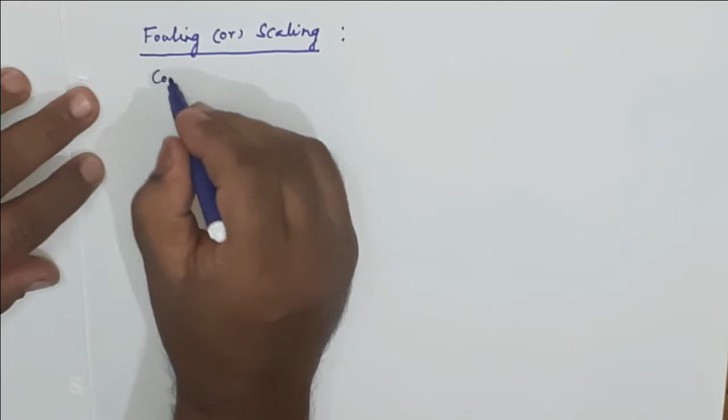Now we'll see about the fouling or scaling. Apart from the convection resistance and conduction resistance, there is some resistance induced during the flow of the fluid, which is called fouling resistance or scaling.

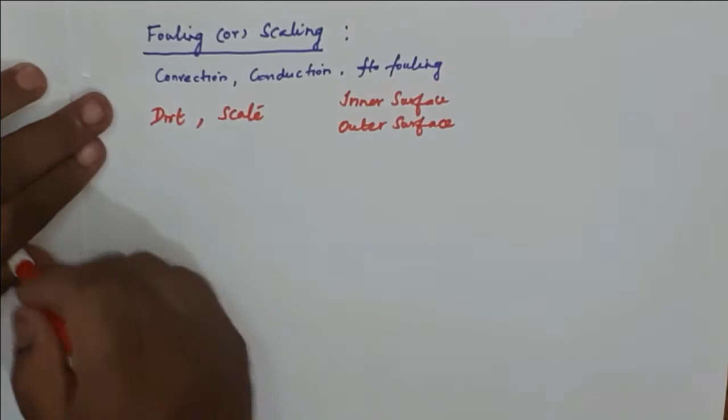For example, this is the inner pipe. I'll show a section of the pipe. This is the inner pipe surface. Inside, a fluid is flowing, say hot fluid.

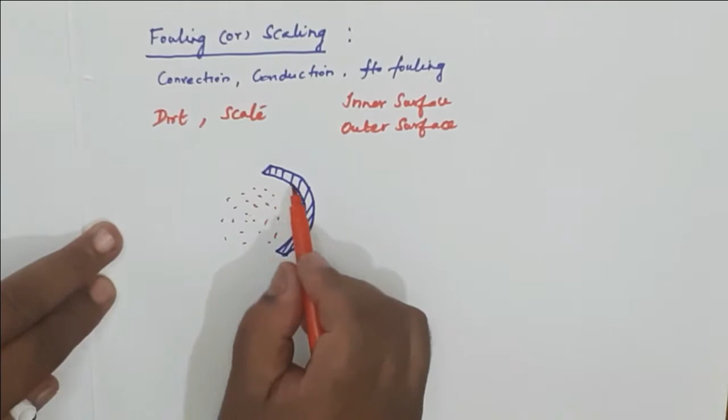Similarly, from the inner surface to the outer surface, the material will not allow the energy to flow easily. There is a restriction. Similarly, from the outer surface you have a cold fluid, and the heat is transferred to the cold fluid.

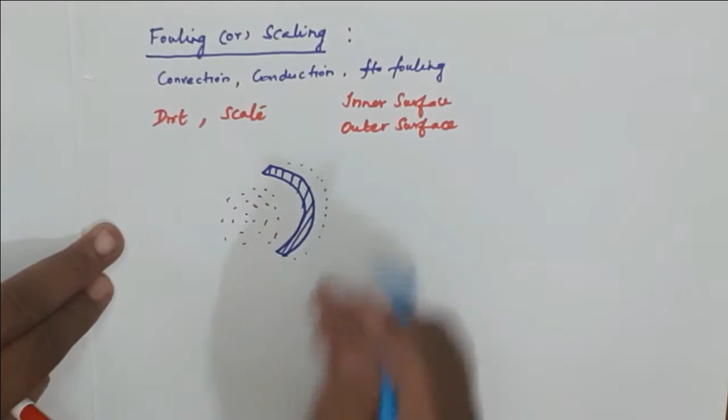So convection, conduction, again convection. Hot water is flowing inside and cold water is flowing outside.

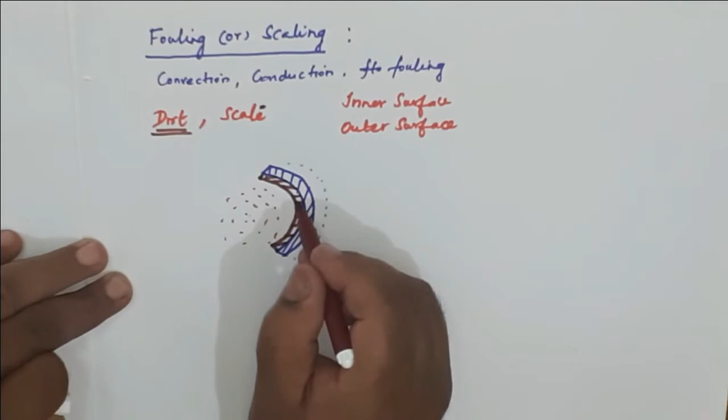Similarly, from the outer surface it has to go to the cold fluid.

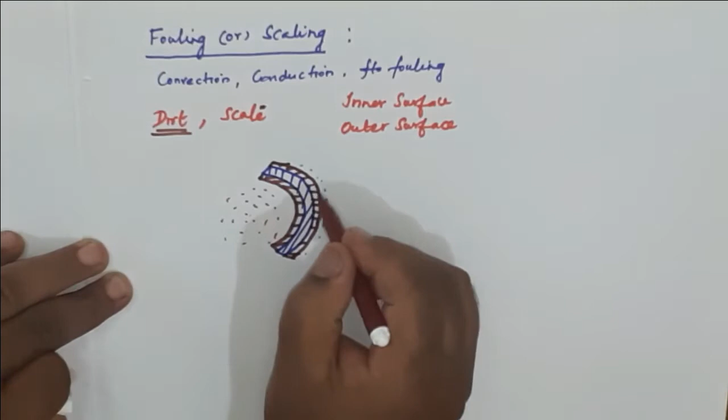This is the temperature of hot fluid, say Th. And where should the hot fluid deliver the energy? It has to deliver to the pipe inner surface, whose temperature is T1.

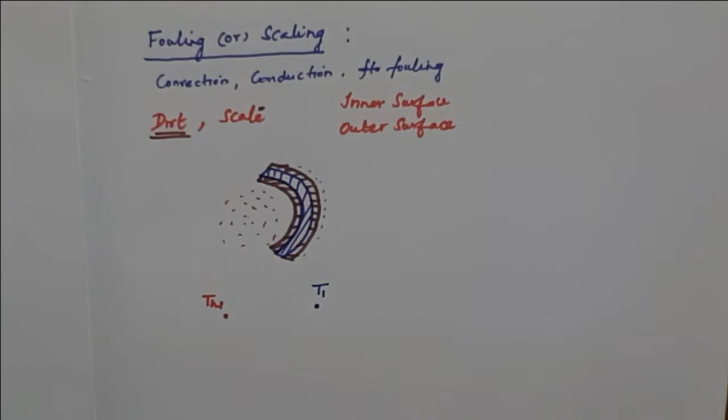Okay, this is the normal case. There is one more resistance induced inside, which is called the scale resistance, shown here in brown color. That is one more resistance, scale resistance.

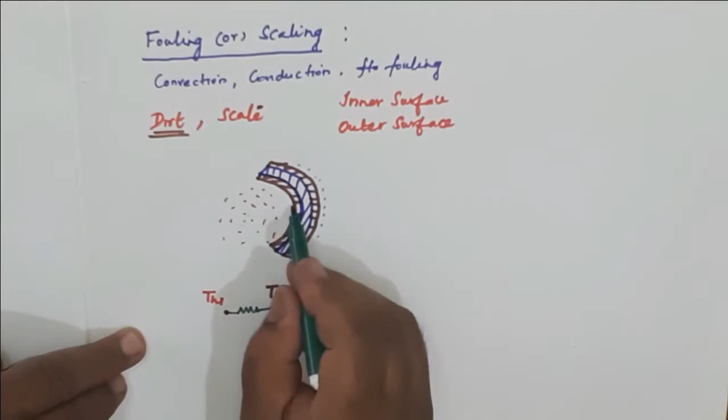See here? So I will mark this temperature now as T scale, inner surface. It is the temperature of the scale surface. Now there is a resistance here. So from the inner surface of the scale to the inner surface of the pipe, there is another resistance. Now from the inner surface of the pipe, through the thickness to the outer surface, heat has to transfer. Mark it here. So there is again a resistance here, conduction resistance.

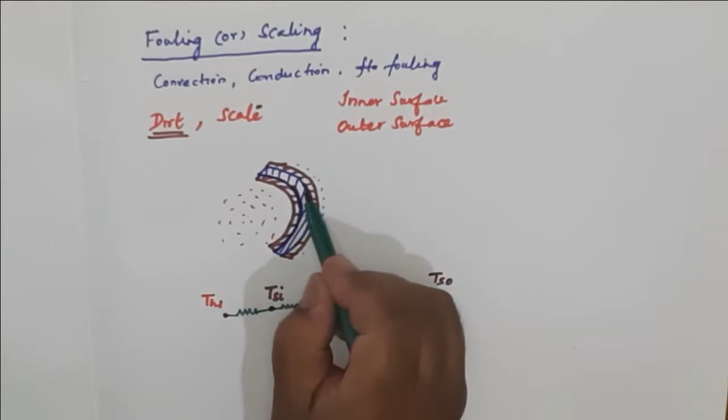From here heat transfers to there, and for that there is some resistance. So I will mark that resistance.

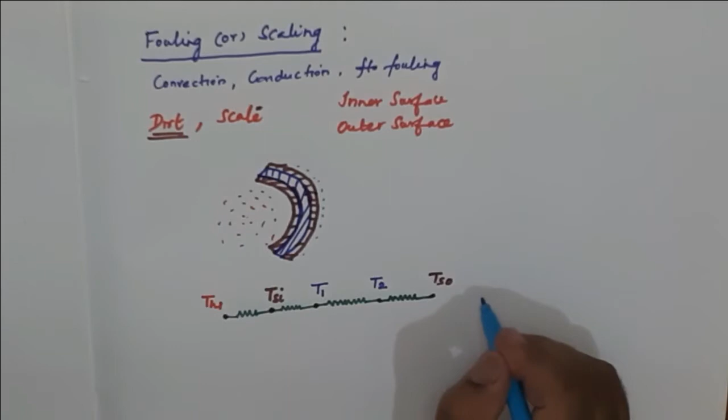From the outer surface again it has to go to the cold fluid. Now there is a convection resistance, and the temperature is marked by TC2. So here again you have convection resistance.

So look, now from the hot fluid, where does the heat energy have to go? It has to go to the cold fluid present outside.

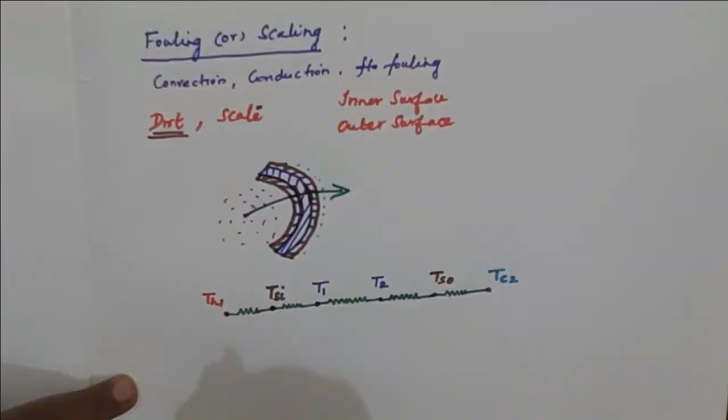Hot fluid temperature TH1, scale temperature is TSI, pipe inner temperature is T1, the pipe outer temperature as T2, the outer scale temperature as TS0, and outer fluid temperature as TC2.

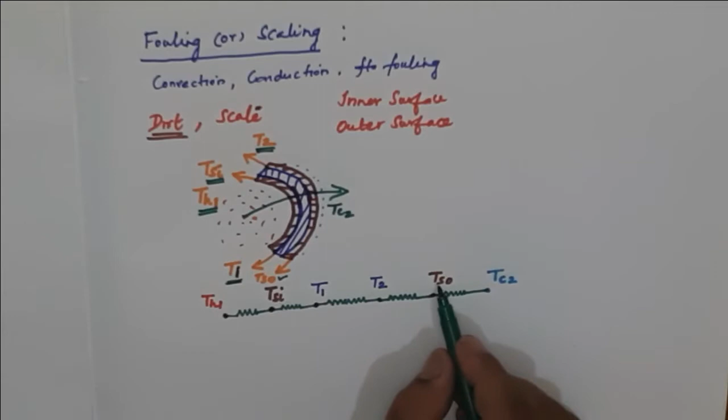Hot water, scale, inner pipe temperature, outside pipe temperature. This is the thickness of the pipe, and this is the scale formed on the outer surface whose temperature is marked, and finally the fluid.

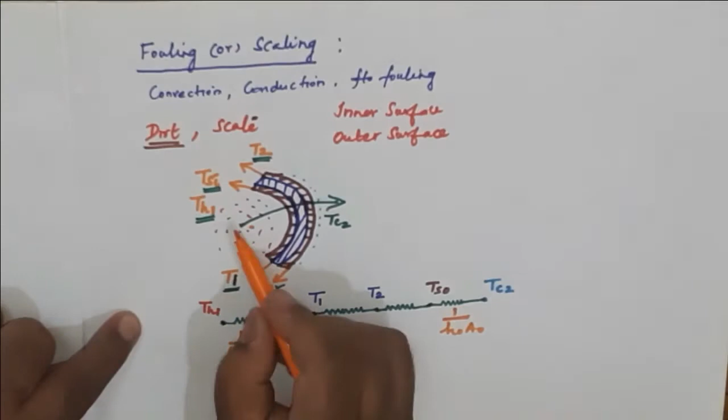So first the hot fluid heats the scale, the scale heats the inner pipe, and heat transfers from the inner pipe to the outer pipe. Then from the outer pipe again the scale heats, and from that scale again to the cold fluid. So there are that many resistances. Now from TSI to T1, what is that?

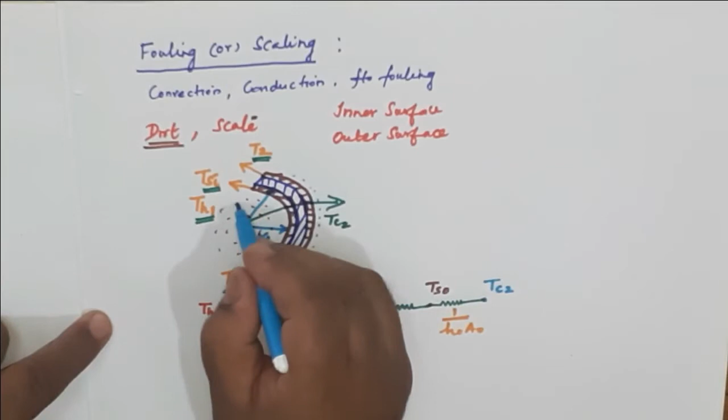That is the scale's resistance. Similarly T1 to T2 is conduction resistance through the material, 1 by 2 pi KL ln of... before this let me mark the radius. Let the inner radius be R1, let the pipe inner radius be R2, let the pipe outer radius be R3. So let the scale outer radius be R4.

So therefore it is 1 by 2 pi KL ln of R3. What is the pipe inner radius? R2. So this is the R3 radius, this is the R2 radius. So R3 divided by R2.

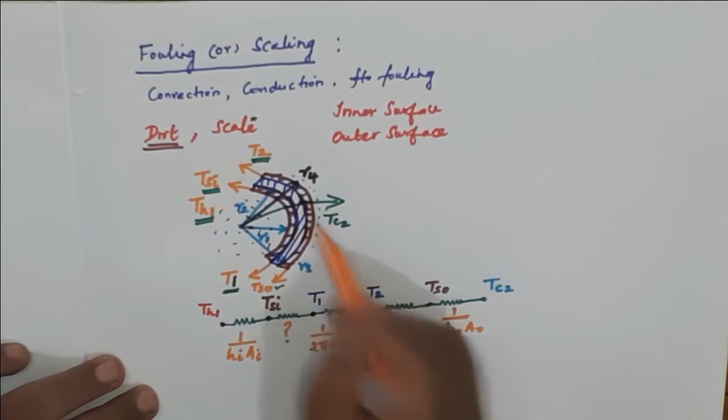Now from the pipe, T2 is the temperature at the pipe's outer surface. From the outer surface, heat has to transfer to the scale, so that resistance also you should know. So now you know all three resistances. What are these resistances? Once you know this, this is what you have to include in your U.

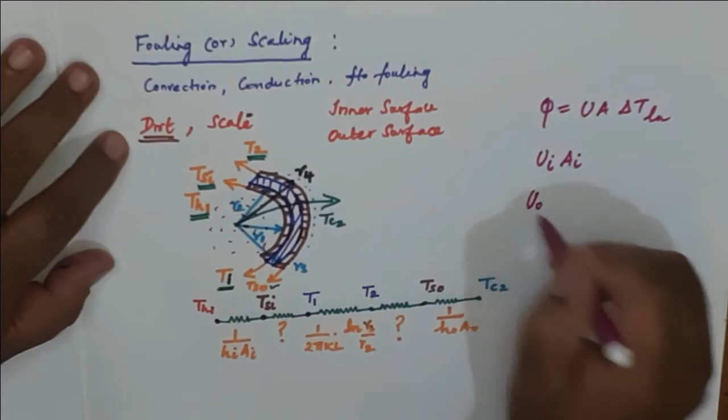Q is equal to UA delta T ln. UI is the overall heat transfer coefficient of the inner surface, AI is the area of the inner surface, U naught is the overall heat transfer coefficient of the outer surface, A naught is the outer surface area, and there's the resistance due to the fouling factor, the resistance from scale deposit, dirt, scale, rust - what resistance does this cause?

So in practice, finding the thickness of the scale formation is difficult. You cannot find out the thickness of the scale. It is not easy, on either the inner or outer surface. If you knew the thickness, what formula could you use? You could use this conduction formula.

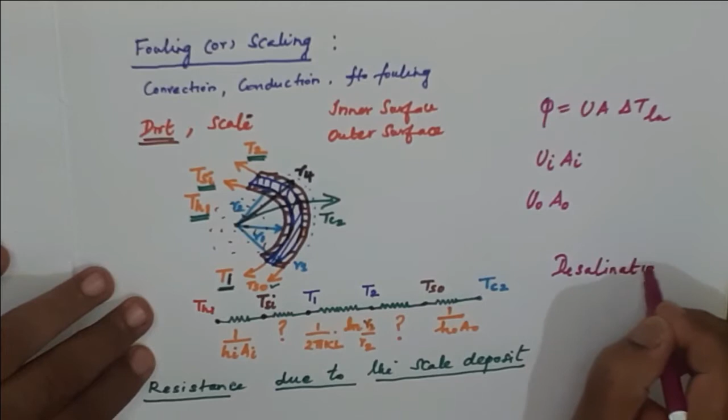That thickness would be L. For example, if you take a desalination plant, what is this? Converting sea water into potable water - that is, converting salt water into drinking water.

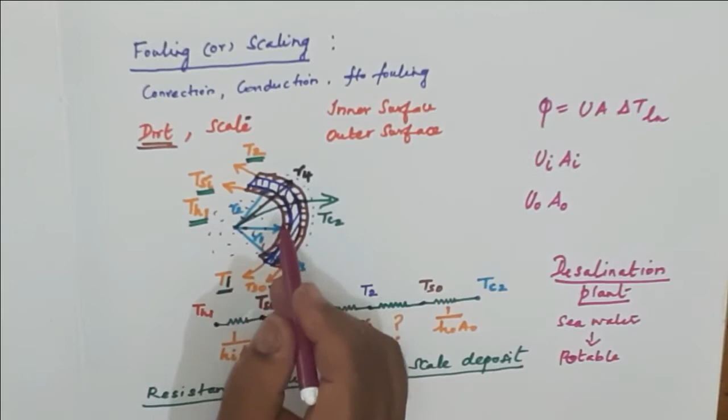You will have sea water flowing inside the tube or outside the tube, so there will definitely be scale formation. So finding that thickness is not easy for us. So instead of that, what do we do? Instead of using this conduction resistance, we consider an equivalent scale heat transfer coefficient.

Here what is heat transfer coefficient? How much energy it can give to this inner surface, H naught - how much heat the fluid can take from the outer surface. That is, instead of this conduction resistance, we try to use the heat transfer coefficient H.

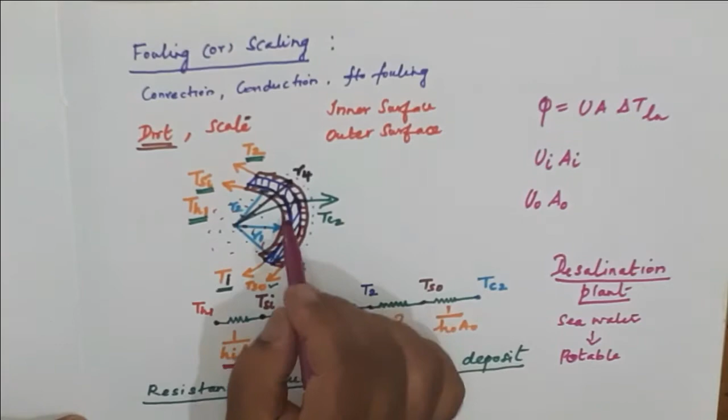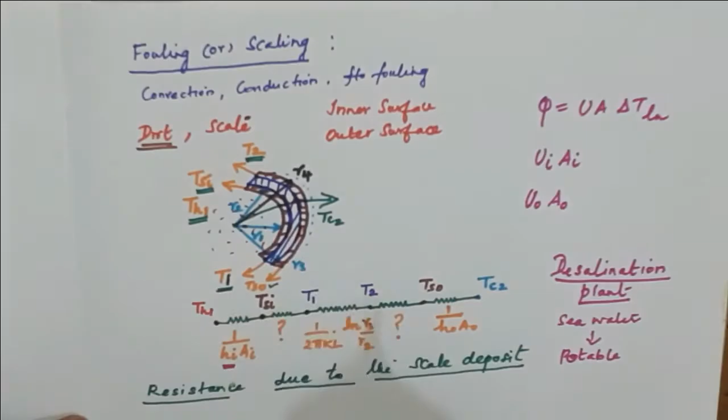So what is H? The scale heat transfer coefficient. HSI and HS naught are the heat transfer coefficients on the inner and outer surface due to scale - the scale heat transfer coefficient on the inner surface, and the scale heat transfer coefficient on the outer surface. This includes the thermal resistance.

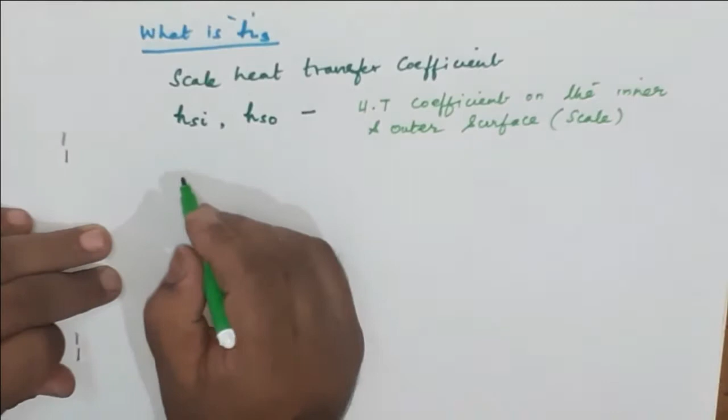Therefore, I can write the thermal resistance as RSI, the thermal resistance due to the scale on the inner surface. This is the pipe, a section of a pipe. So what form is inside? Resistance - what form is the scale in? The scale is in a formed layer. So through what does this heat energy have to pass? Heat energy has to conduct through this resistance.

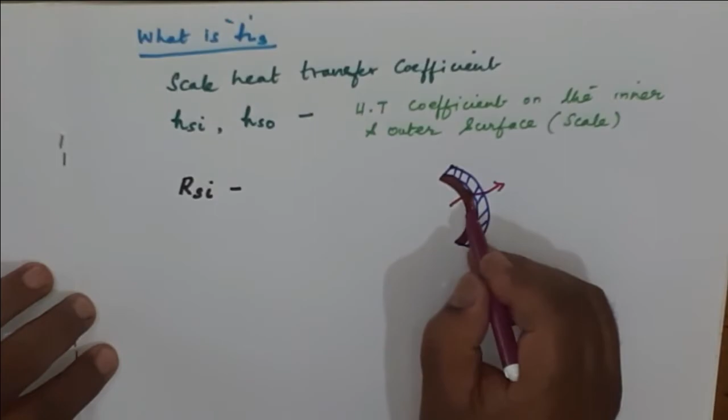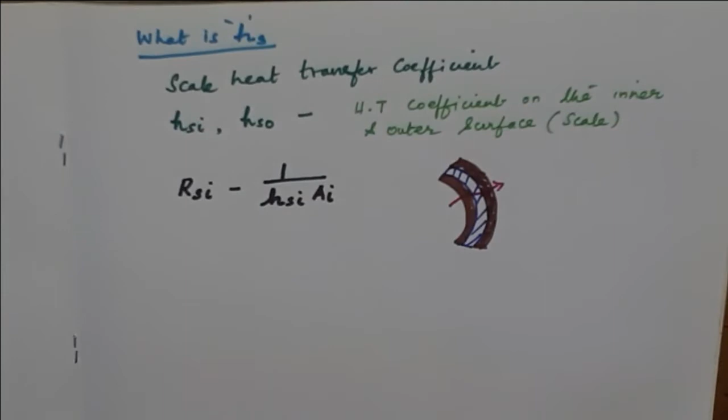Similarly, does scale form on the outside too? On the outside, the water flowing around this pipe - if it is hard water, if it has chemicals, if it has dirt, dust, impurities etc. - that also has a resistance. So that resistance can be written as Rs naught, that is 1 by Hs naught A naught, the heat transfer coefficient due to scale on the outer surface, and A naught is the area of the outer surface.

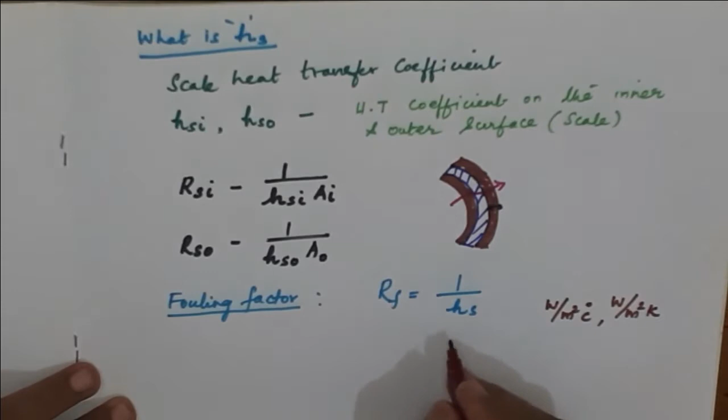So there is one more term we use here - the fouling factor, which is the reciprocal of the scale heat transfer coefficient, 1 by H. What is the unit of H? Watt per meter square degree Celsius, or watt per meter square Kelvin. So what is the unit of RF? Meter square degree Celsius per watt.

Okay, how are these determined? How do we find this out? This fouling factor RF, which is nothing but 1 by Hs, is the thermal resistance due to scale. How to find this out? You can find this by conducting an experiment: 1 by U dirty minus 1 by U clean. When the pipe is clean, find its U, the overall heat transfer coefficient. After a certain number of operations, it will become dirty.

It will have scale. Upper find out the U. What is U clean? How much heat energy transfers from inside to outside without the scale - that is U clean. What is U dirty?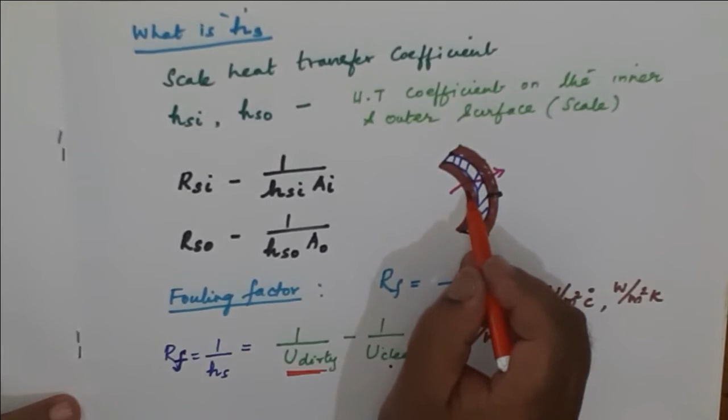So now you have to include this in U. Okay fine, so UI, U naught - so you have which resistance? Convection inside, conduction through pipe thickness, convection outside. Similarly here, the same resistances. Along with this, you have to add scale resistance. That's all. Now, scale resistance can be included in the overall heat transfer coefficient.

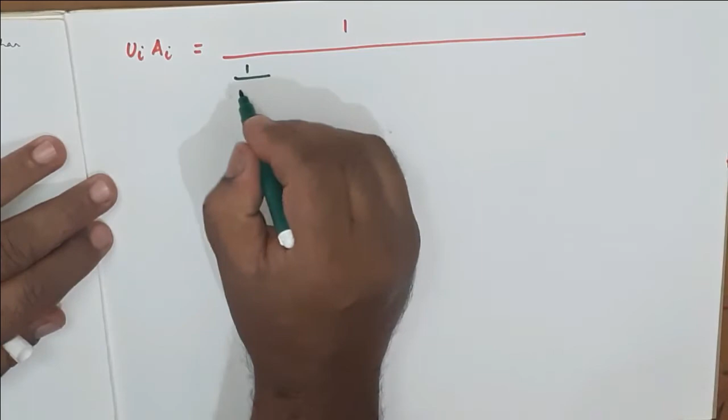So, with respect to the inner area, UI AI is equal to 1 whole divided by 1 by the convection resistance due to the fluid plus the resistance due to the scale, 1 by HSI scale resistance on the inner surface, plus 1 by conduction resistance 2 pi KL ln of R3 by R2.

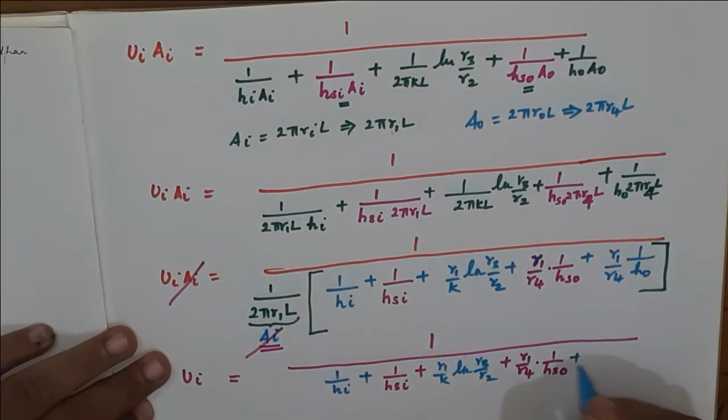Okay, so what will happen now? So UI, you'll get it as UI is nothing but 1 whole divided by 1 by HI plus 1 by HSI plus R1 by K ln of R3 by R2 plus R1 by R4 into 1 by scale heat transfer coefficient on the outside surface plus the convection resistance due to the fluid on the outside surface.

This is the convection resistance due to the fluid inside. This is the scale resistance. This is the conduction resistance due to the material. This is the scale resistance on the outside surface. This is the convection resistance due to the fluid on the outside surface.

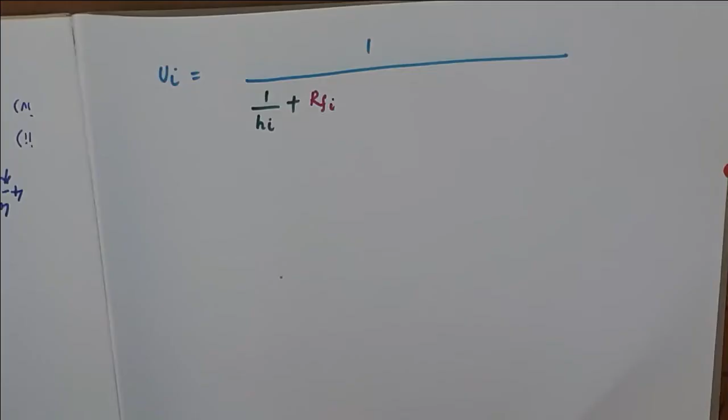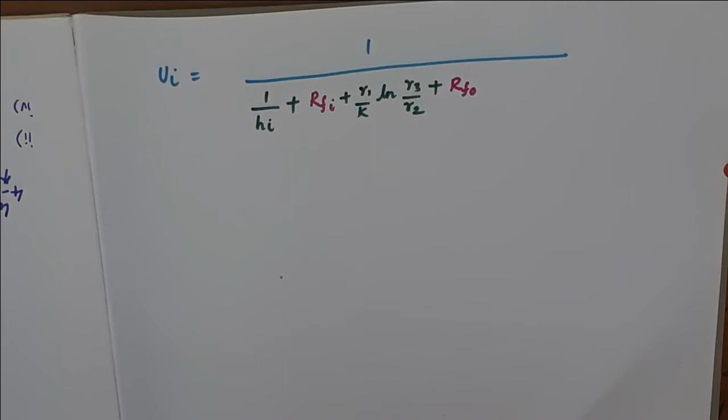Therefore, UI can be written as 1 whole divided by 1 by HI, plus this can be written as fouling factor, reciprocal of the heat transfer coefficient of the scale, fouling factor Rf in the inner surface, plus R1 by K ln of R3 by R2, plus this term 1 by HS naught can be written as Rf naught, the fouling factor in the outside surface, the resistance due to scale formation on the outside surface into R4 by R1, plus R4 by R1 into 1 by H naught, the convection resistance. So this is UI. We have included this term, we have included this term.

That is the only difference. Similarly, what you will get for u naught? If you derive it following the same procedure, when I take the inner area, I get 1 by hi. And what happens here? r4 by r1 into 1 by h naught - the reverse will happen. So it becomes r4 by r1 into 1 by hi, plus resistance here due to scale, which becomes r4 by r1 into rfi, the fouling factor on the inside surface, plus r1 by k ln of r3 by r2, plus rf naught, the fouling factor on the outside surface, plus 1 by h naught. So now you know how to calculate ui and u naught including the fouling factor.

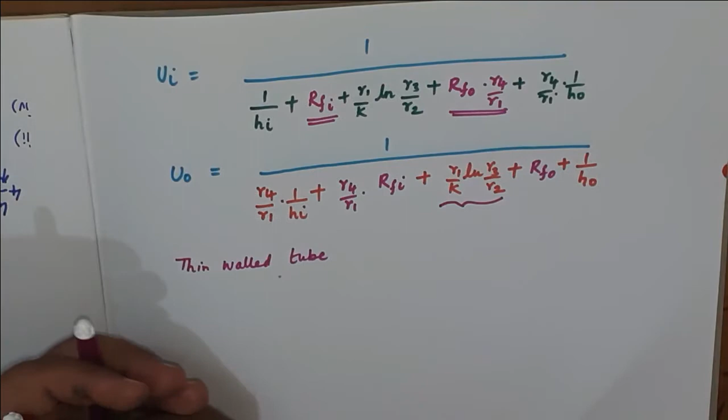In case of a thin walled tube, when the wall is very thin, the conduction resistance term can be neglected. For example, this is the inner pipe surface, and this is the pipe thickness. For heat energy to cross from inside to outside, it must pass through this thickness across the entire length, so there is resistance there. But since this is a very thin tube, much smaller than what I've shown in the diagram, there is resistance there, but you can neglect it.

If you remove this term, what do you get? You will get 1 by this term - convection resistance, then scale resistance on the inside surface, scale resistance on the outside surface, and then convection resistance.

For a thin walled tube, this conduction resistance won't be there. Suppose there is no scale formation inside or outside, a new heat exchanger, you will not have this term. In that case, what will be the overall heat transfer coefficient for the outside surface? 1 by, instead of r4, now it becomes r2 by r1 into 1 by hi, because no scale is there. So when it's a thin walled tube, you can neglect this resistance. If scale is not there on the inside surface, you can neglect this term. If there's no scale on the outside surface, you can neglect this term too.

So what terms will you have? Convection resistance - here also you will have the convection resistance. What will be the formula? It will not be R4 by R1, it will just be 1 by Hi plus 1 by H0.

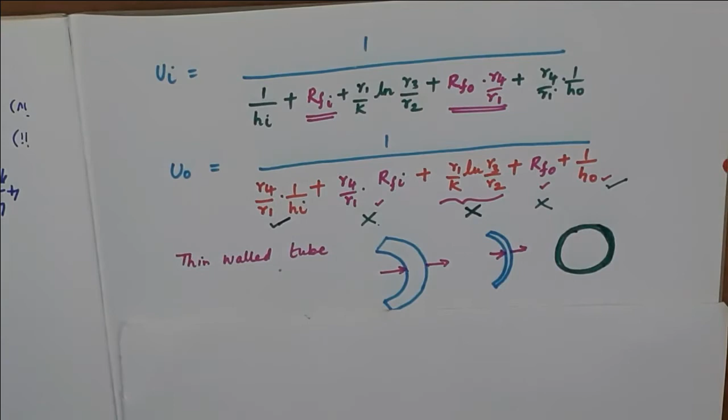Why? This is the pipe thickness - let me draw this. So this is your pipe with very small thickness, so you can neglect the conduction resistance. When I say this is R1 radius, and this is R2, what will this equation be? R2 by R1 into 1 by Hi. This is not there, this is not there, this is not there, plus 1 by H0.

Along with that, what can we do about R2 by R1? R2 by R1 can be neglected since it's very thin. So finally you will have this equation: U0 is equal to 1 whole divided by 1 by Hi plus 1 by H0.

So based on the situation or given problem, you can modify this equation. You can modify the equation - convection resistance outside will definitely be there, convection resistance inside will definitely be there. If the thickness is very less, neglect that term. If scale formation is there inside but not outside, include that term and neglect the other. Or if scale formation is there on the outside surface but not inside, you change accordingly. So you can adapt based on the given situation.

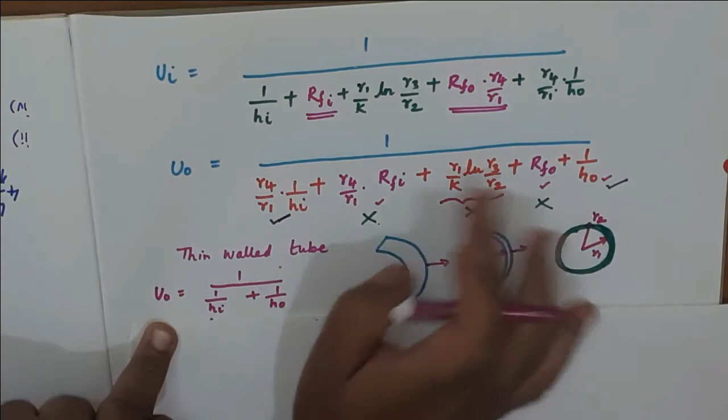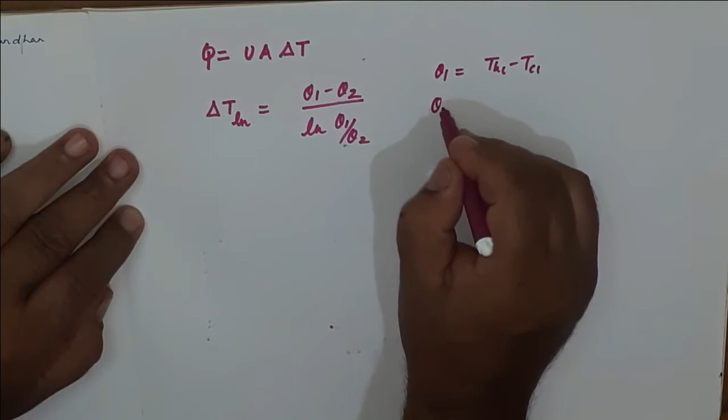So now in a heat exchanger, the heat transfer Q is equal to UA delta T. This is the general formula for rate of heat transfer, and if it is a parallel flow or counter flow heat exchanger, delta T has to be replaced by the logarithmic mean temperature difference, given by theta 1 minus theta 2, divided by ln of theta 1 by theta 2. For parallel flow, theta 1 is TH1 minus TC1, and theta 2 is TH2 minus TC2. If it is a counterflow heat exchanger, theta 1 is the hot fluid inlet temperature minus the cold fluid exit temperature, and theta 2 is the hot fluid exit temperature minus the cold fluid inlet temperature.

That is the only difference. Now you know what the area is. If you are calculating heat transfer with respect to the inner area, A is nothing but 2 pi Ri or R1L.

If you are calculating the heat transfer with respect to the outside surface, it is 2 pi R0 L. So you know A, you know delta T. So you know Ui, we have done it, U0 we have done it. So how many resistances will you have? You will have convection, then conduction, and you have scale resistances.

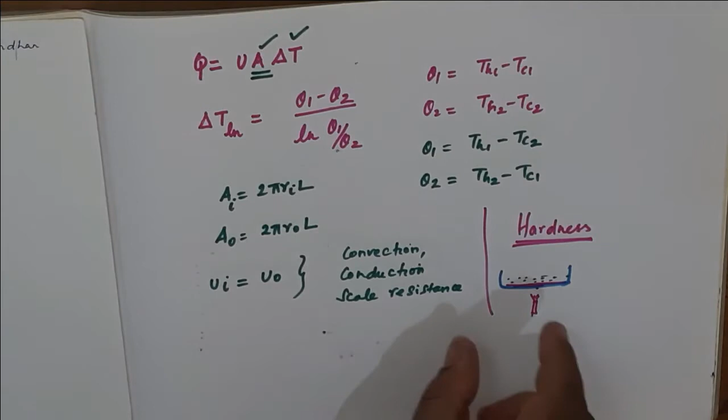Now for this fouling factor, what will be the value of U normally? For example, for sea water, it is 0.001 meter square degree Celsius per watt.

This is for sea water. If you take lake water or river water, U will be around 0.002 to 0.006 - this is for clean water, lake water, or clean water.

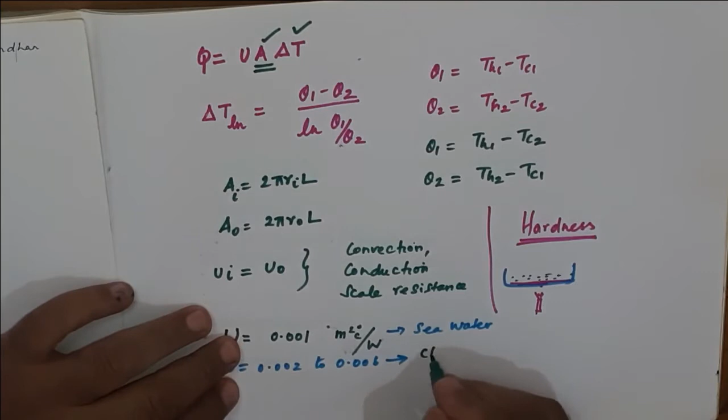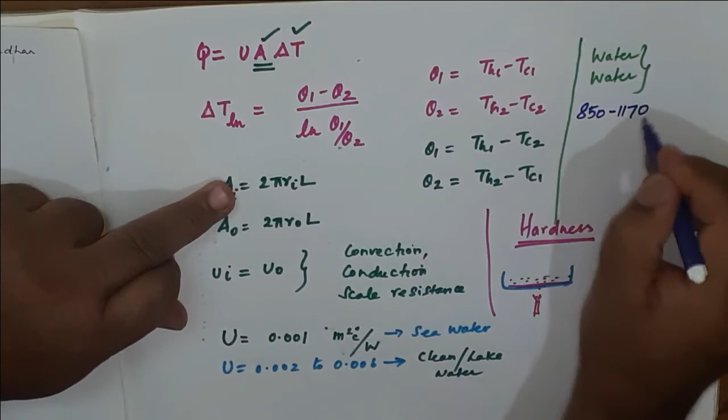So what will be the overall heat transfer coefficient values normally? Inner tube you have water, outside also you have water - so both the tubes have water. In that case, what will be the value of U? U will be around 850 to 1170 watt per meter square degree Celsius or Kelvin.

In one pipe you have water and another pipe you have oil - you need two fluids in a heat exchanger, one hot and one cold. Suppose water is one fluid and oil is the other fluid, then it will be around 110 to 350 watt per meter square degree Celsius. So heat transfer for water to oil is always lower, and water to water is always higher. These values are given just for understanding.

With this, the LMTD method is over. Now you know how to calculate U for a given situation, and A delta T. For parallel flow you know which formula to use, and for counter flow. So which is better? Counter flow heat exchanger performance is better than parallel.

Which do they prefer? Counter flow is better than parallel flow. So which can you prefer? You always prefer counter flow heat exchangers.

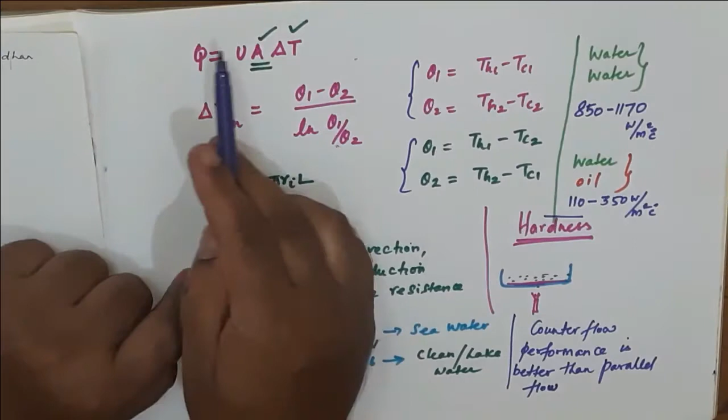Already I have told you there are different types of heat exchangers. This formula cannot be used for cross flow heat exchangers. So if we need to do cross flow, what do we do? Some modification has to be done to this equation.

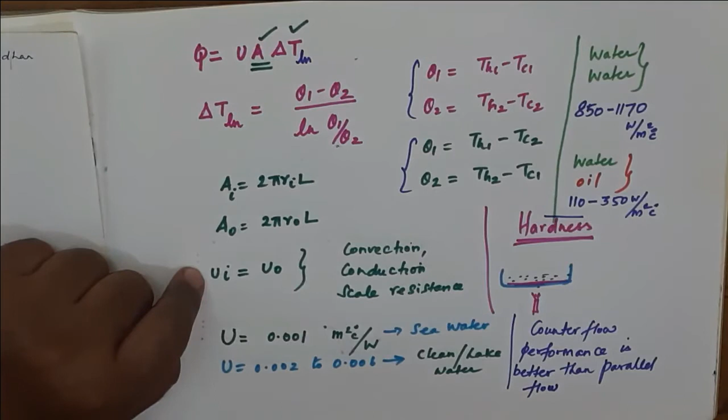We will see that later. In the next lecture we'll see NTU - Number of Transfer Units. So design of heat exchangers based on that method is called NTU method.

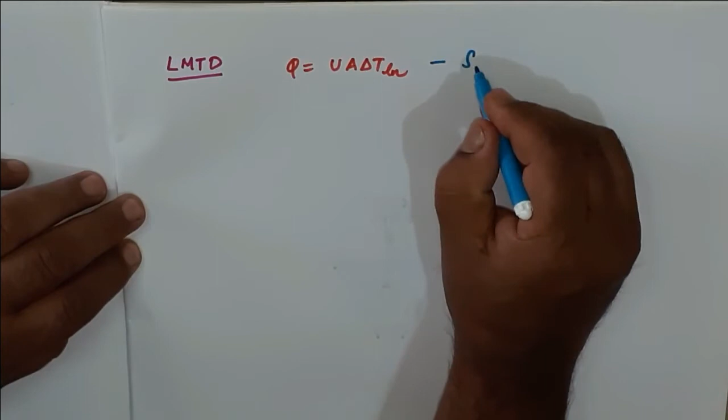In this class we'll see about a new method of design of heat exchangers called the NTU method. Before going for this NTU method, let us discuss some correction factors involved in the formula of LMTD method. In LMTD method, the heat transfer rate equation is given by Q equals UA delta T ln. This equation is applicable only for single pass heat exchangers.

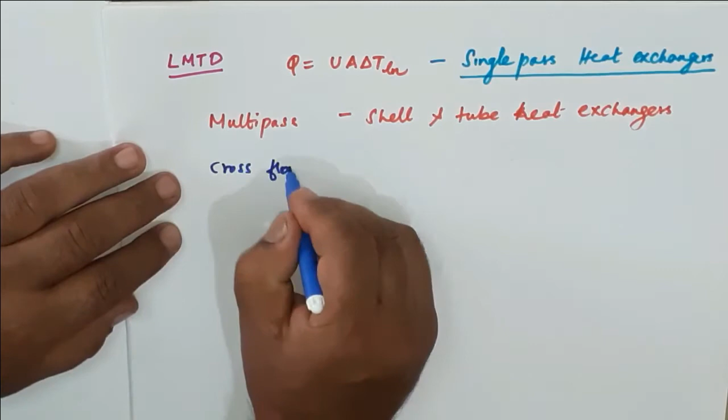This formula can only be used for single pass heat exchangers. There are cases of heat exchangers with multi-pass shell and tube configurations. In cross flow heat exchangers, this equation is not applicable. In that case, this equation is modified and written as Q equals U into A into F into delta T ln.

So there is one more term now included in this equation. What is it called? F - this F is called the correction factor.

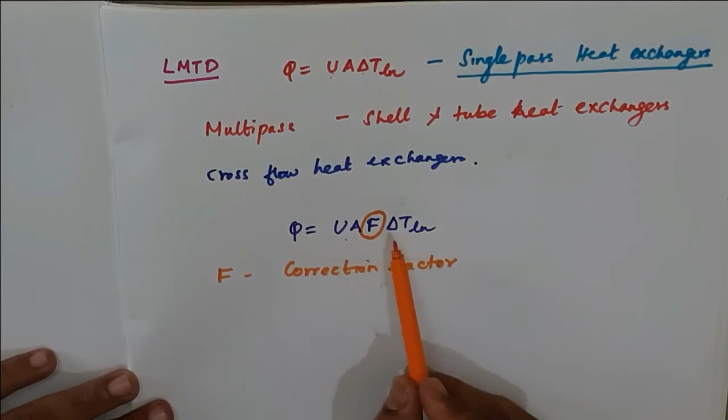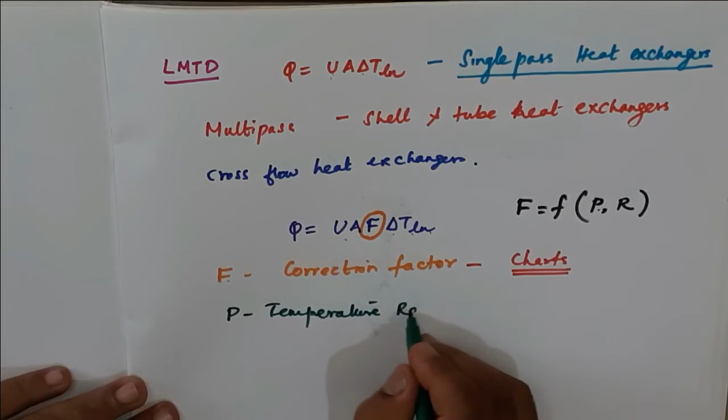F is nothing but a function of P and R - F depends on P and R. What is P? Temperature ratio. P is called the temperature ratio and R is called the capacity ratio.

So to calculate F first, you should find out P and R. Once you find out P and R, from charts or graphs, you can find out F. So what is this temperature ratio P?

It is TC2 minus TC1, where C is for cold fluid - 2 is exit temperature minus cold fluid inlet temperature, divided by TH1, where H is for hot fluid - hot fluid inlet temperature minus TC1, cold fluid inlet temperature. So for any given multi-pass or cross flow heat exchanger case, first you have to calculate P.

When calculating P, what do you need to know? Hot fluid inlet temperature, cold fluid inlet temperature, and cold fluid exit temperature. Now that all three temperatures are known, you can find out P.

Similarly, calculate R. What is R? R is called the capacity ratio. How can you define R? R is nothing but the product of mass flow rate and heat capacity, m dot c into CPC divided by m dot h into CPH.

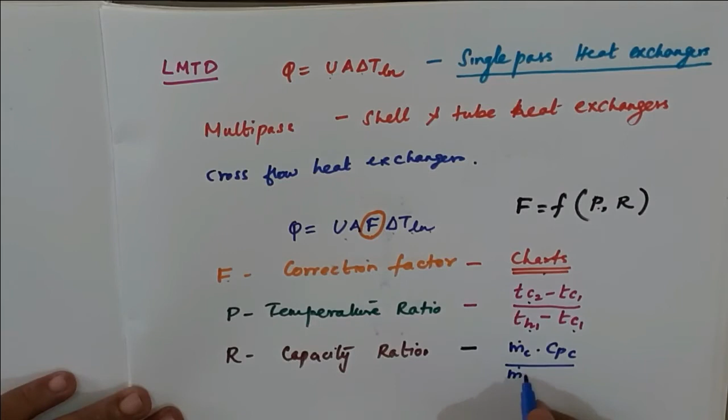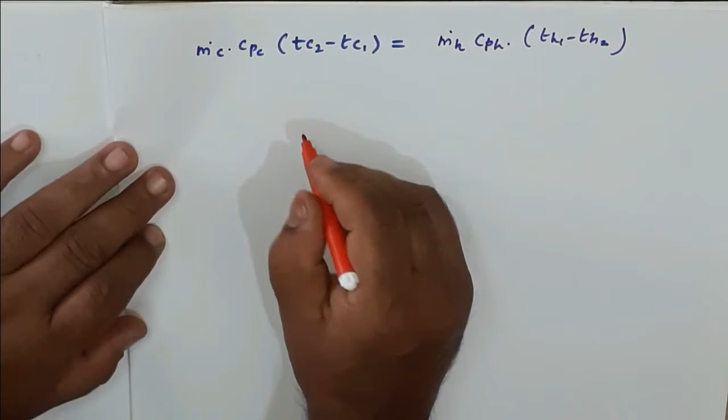You know the energy balance equation: m dot c into CPC into TC2 minus TC1 equals energy gained by the cold fluid, which equals energy lost by the hot fluid, TH1 minus TH2. So what is R? It is the ratio of heat capacities of cold fluid and hot fluid, m dot c CPC divided by m dot h CPH.

Cold fluid by hot fluid. It is equal to - take this to the other end - TH1 minus TH2 divided by this side. When I take it to the other end, what do you get? You get TH1 minus TH2 whole divided by TC2 minus TC1.

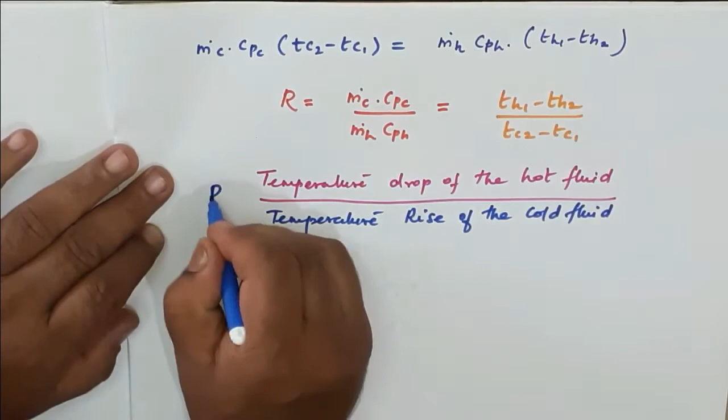TH1 minus TH2 is the temperature drop of the hot fluid, and TC2 minus TC1 is the temperature rise of the cold fluid. So it is temperature drop of the hot fluid divided by temperature rise of the cold fluid - this is nothing but R. So what you need to do is look at the chart for F, and for that you need P and R.

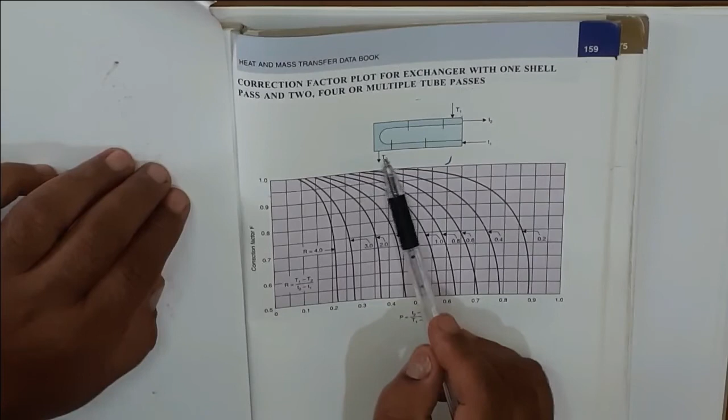Capital letter represents hot fluid, small letter represents cold fluid. T1 is hot fluid inlet temperature, T2 is hot fluid exit temperature, t1 is cold fluid inlet temperature, t2 is cold fluid exit temperature. These are baffles.

It's a single shell, one shell, and how many passes - 2. The fluid goes through the tube and comes out. So when hot fluid comes through, the first time it contacts here, and again from here the hot fluid comes in contact with the cold fluid a second time as it comes down through the tube. Since there are two contacts, it's called a 2 tube pass.

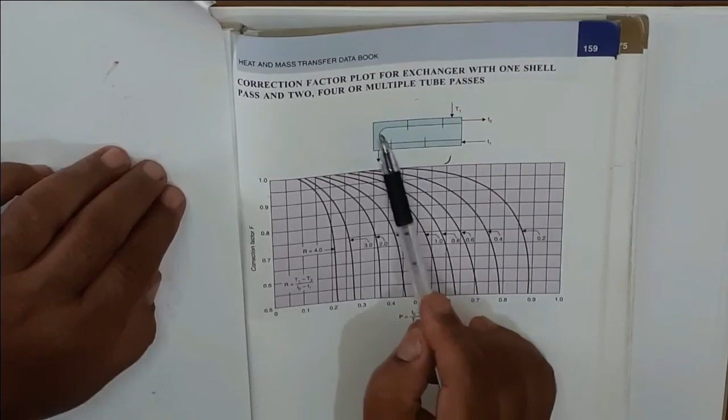On the left, the y axis shows the correction factor, the x axis shows P, and the curves represent R. So first you identify P, which you calculate using the formula.

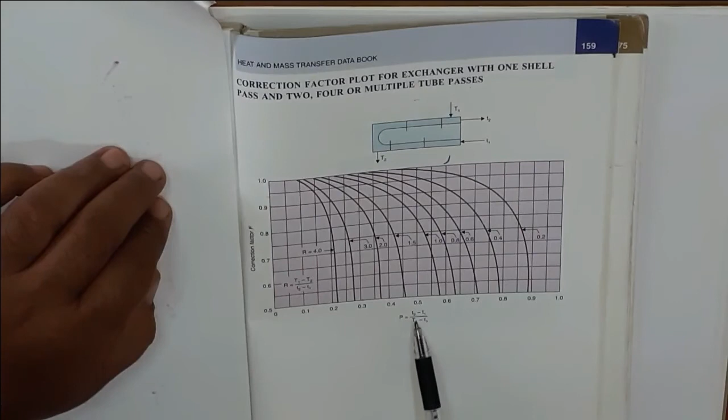Then you calculate R. So from P and R - suppose after calculating P you get 0.5, and after calculating R you get 1. Which curve is R equals 1? See here - R is 4, R is 3, R is 2, R is 1.5, R is 1. These are the curves. Suppose you get R as 1 and P as 0.5 - now see where the two intersect, at 0.5.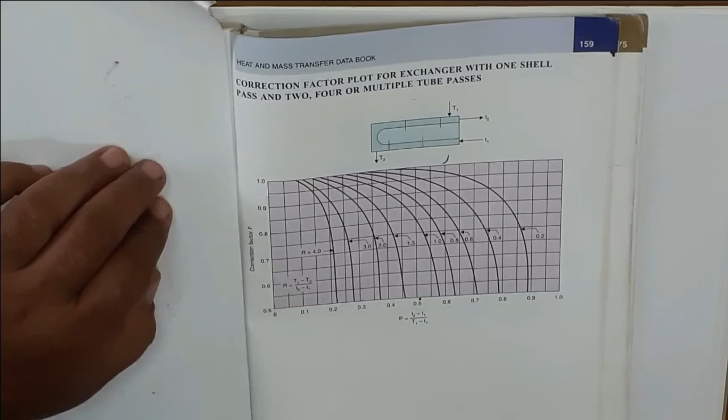It intersects this curve, this curve is 1, and the corresponding F is 0.8. So what you do in the equation Q is equal to UA F delta T, the F you have to put as 0.8.

So first calculate P, then calculate R, where P and R intersect, the corresponding F you can find out and use it. Now where is this chart used? Not just 2 pass, but 4 pass or multiple tube passes. Similarly, correction factor plot for exchanger with 2 shell passes. In the previous case it was 1 shell, now 2 shell passes and 4, 8 or any multiple number of tube passes. So the last case was 1 shell and 2 pass.

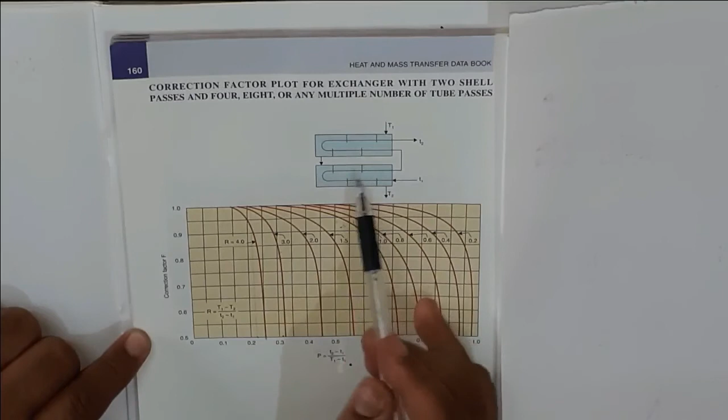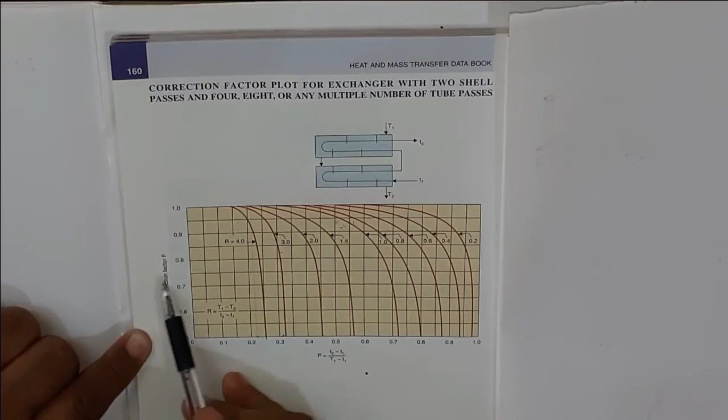So how many shells - this is 1, this is 2. So you have 2 shell passes and 4 tube passes. The same chart can be used for 8 tube passes or any multiple number of tube passes. So for 2 shells use this page, for single shell use the previous page. Again the same procedure - calculate P, calculate R, you can find out F from it.

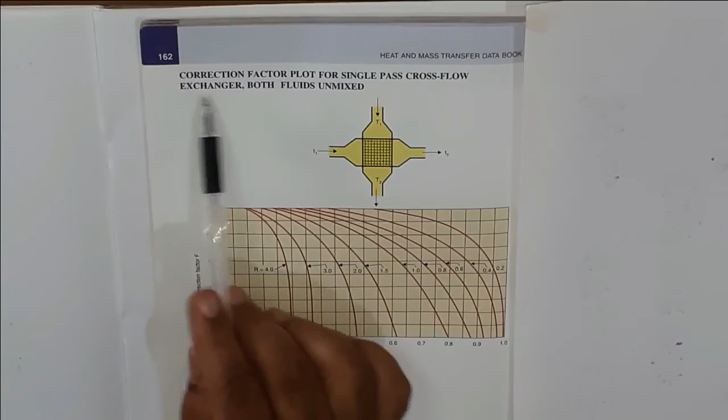Okay, this is cross flow - one fluid in this direction, another fluid at 90 degrees. So that's cross flow. Now you see the correction factor plot for single pass cross flow exchanger, both fluids unmixed.

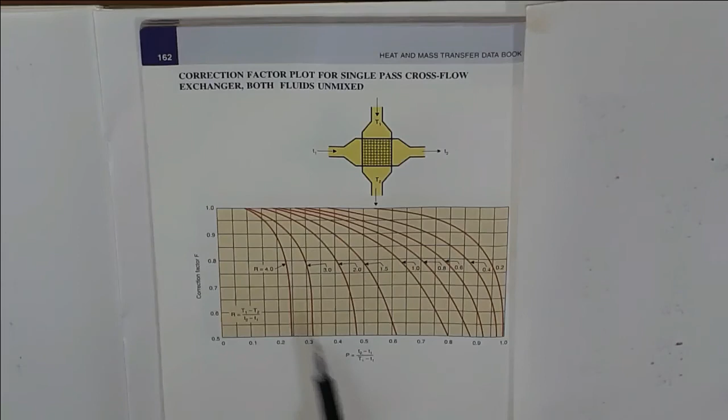So for this too, what you can do is calculate P and R and find out F. This F value you directly substitute in the equation.

Q is equal to heat transfer rate. Q is nothing but equal to U A F delta T log. F is a function of P and R. P is the temperature ratio, R is the capacity ratio.

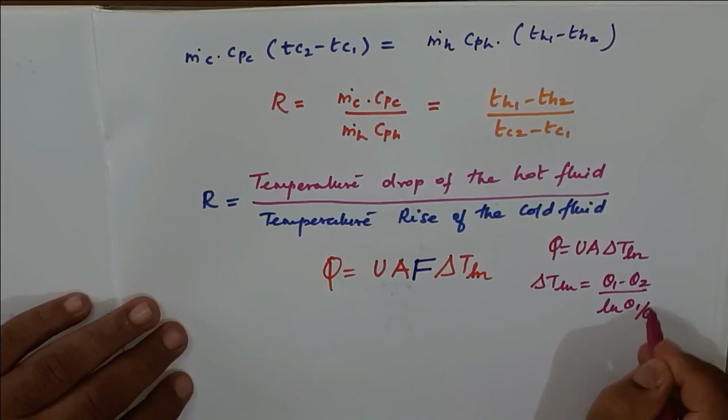So far we have seen 3 formulae. One is Q equals UA delta T ln, the general formula, where delta T ln is nothing but equal to theta 1 minus theta 2 divided by ln of theta 1 divided by theta 2. And the final formula here, Q equals UA into F into delta T ln.

So this one we'll use for parallel flow or counter flow, only theta 1 and theta 2 change when you take them. This one is for cross flow or multi-pass heat exchanger, you can use this formula. So nothing difficult - now you can solve any problems using the LMTD method.

Now we'll see what is the NTU method. NTU is number of transfer units. You will see.